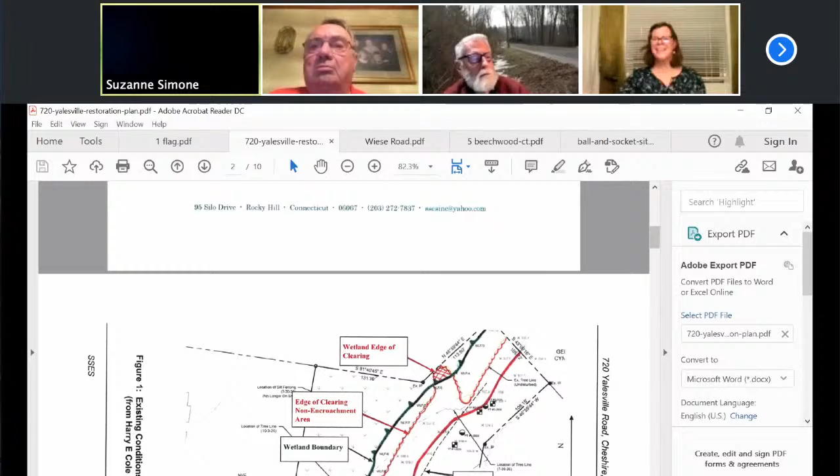Oh, I'm sorry, Jen, I'm putting your picture up. I was able to share it, so I hope that helps. That's really cool. You did say it was going to be very exciting, so that is neat. I didn't know you could do that.

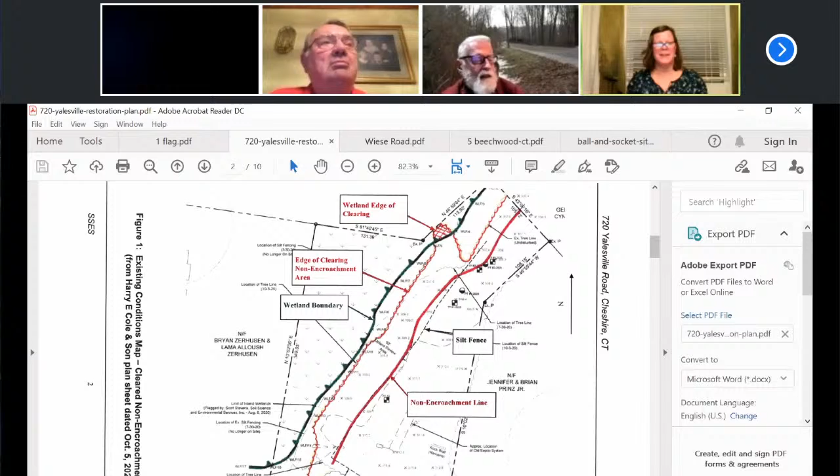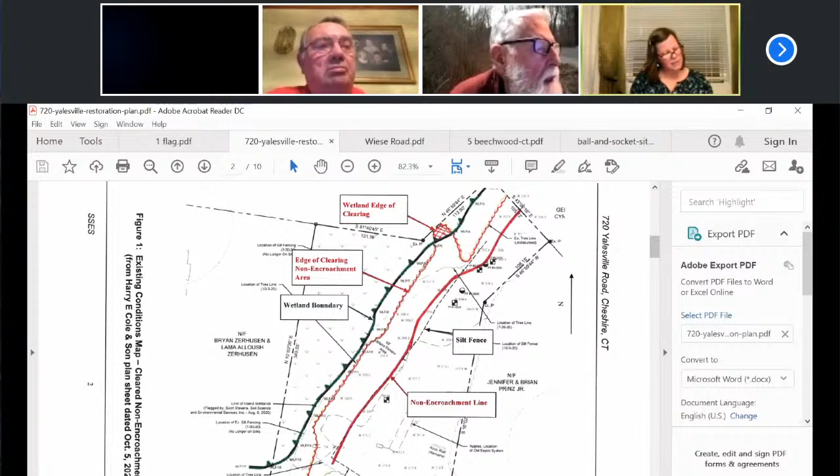Okay, cool. Yeah, so you can see the edge of clearing and your non-encroachment line, which was established previously. And also the wetland boundary is shown on there. So let's see. Can you jump to page 6, maybe, please? Sure.

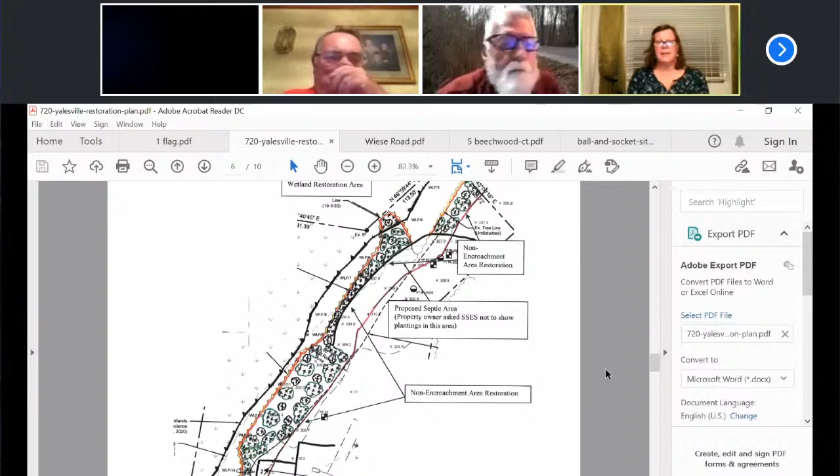Is this 6? Yes. So that shows the overall proposed plantings that we're recommending. And as you can see, there's a proposed septic area and a proposed driveway with some grading within your non-encroachment area. So the owner asked us to not show plantings in those areas.

So in the cleared wetland area, I'm proposing 1 tree and 5 shrubs. And in the cleared non-encroachment area, we're proposing 18 trees and 136 shrubs. Basically, the soils in the cleared wetland area have become vegetated. The herbaceous vegetation's coming back. It's reestablishing in that area. So I don't think a seed mixture will be needed in the wetland area.

There will be a seed mixture needed in the non-encroachment planting area just to keep the soils stabilized. And I recommend a seed mixture at the end of the report. It's from New England Wetland Plants up there in Massachusetts. They have a conservation wildlife mix or a New England wildflower mix. Either one would work in there, or a combination would be fine.

So I've recommended native non-invasive species be planted within the non-encroachment and wetland areas. Species for the wetland include pin oak, the tree species, and the shrubs are winterberry, highbush blueberry, and arrowwood. Non-encroachment area plantings can include sugar maple, black birch, eastern red cedar, pin oak, red oak, black chokeberry, shadbush, sweet pepper bush, gray dogwood, red osier dogwood, and some winterberry.

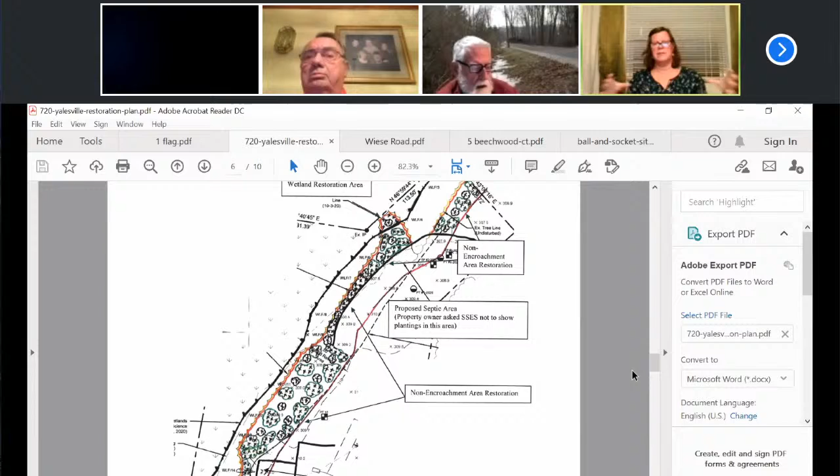We also recommend that the erosion sedimentation control measures should be maintained until the soils have all been stabilized on the site. We also recommend that the owner install some sort of physical demarcation so there's no accidental intrusion into this non-encroachment area in the future. That could include just rocks, or some sort of fence. I did notice there are quite a few large rocks on the site, so it could be a possibility.

As I mentioned before, he'll need to manage the invasive species within the planting areas until the native non-invasive plantings become established and can compete. And finally, we recommend monitoring reports for 5 years. The monitoring reports should document the survival rate of the plantings, any erosion sedimentation control issues in the areas, and whether any invasive species need to be controlled or managed. And I think that about sums it up. So if you have any questions...

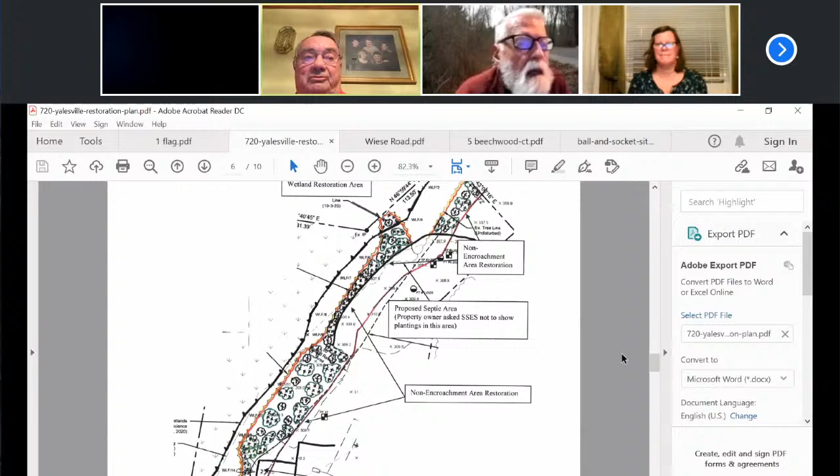I think it's a good plan. The only problem is this is a hearing for restoration, not a hearing for delineating the upland review area or the wetlands. We need restoration of the site as was originally approved. Now, I know that the permit has expired, but that doesn't pertain to the plan that was approved, which includes the non-encroachment line as well as the wetlands line. And I think it's a little premature to discuss a new permit when we haven't solved the problem, which was violation of the old permit, and the hearing calls for a restoration plan. That's my personal feeling. I don't know what the town attorney would say about it, but that's the way I look at it.

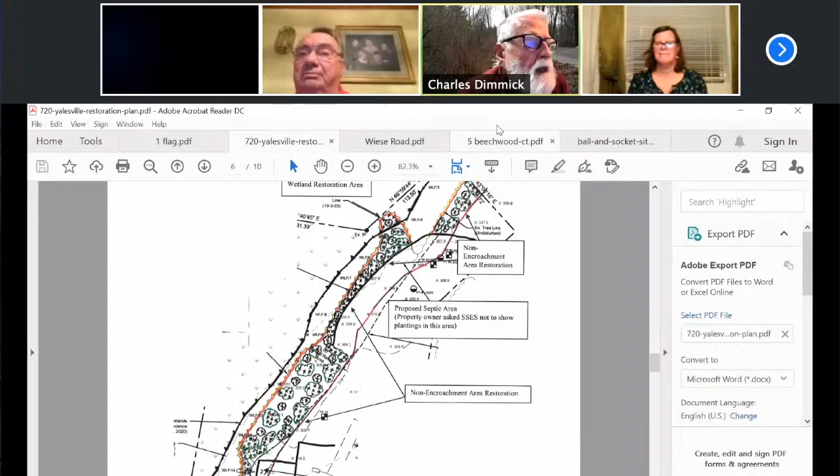Mr. Chairman, I agree it's a good plan, but there is the question of this proposed septic area, because that was, as far as I know, not part of the original permit, which, as you say, has expired. So I would say we approve the proposed restoration plan with the caveat that unless he goes through us to get a permit for this proposed septic, restoration must extend through the rest of that non-encroachment area also. Well, I agree with that, but I worry about moving the line for the non-encroachment area. Right.

Yes, Mr. Chairman, the non-encroachment area was previously established. So what is shown on the plan that Ms. Benno presented, that was the established non-encroachment area. That has been cleared, and Ms. Benno was hired to look at only some of the area. That's what the property owner had hired her to do. So it does not address the full complement of what was damaged. And my suggestion to the commission is that I do not have any motions prepared for acceptance of the restoration plan tonight.

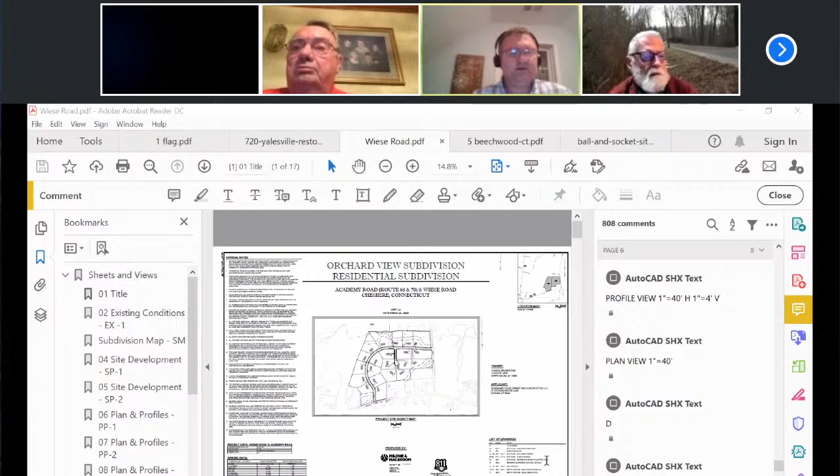Next sheet, I think, would be best, Suzanne. The parcel, which many of you are familiar with from driving around town, is most visible from Wiese Road, where as you enter from Academy Road headed north on Wiese, there's a large open field to your left with Norton Brothers Fruit Farm on the east. This property has been historically agricultural in nature, although the only relic of that use is the hayfield in the eastern roughly third or half of the site.

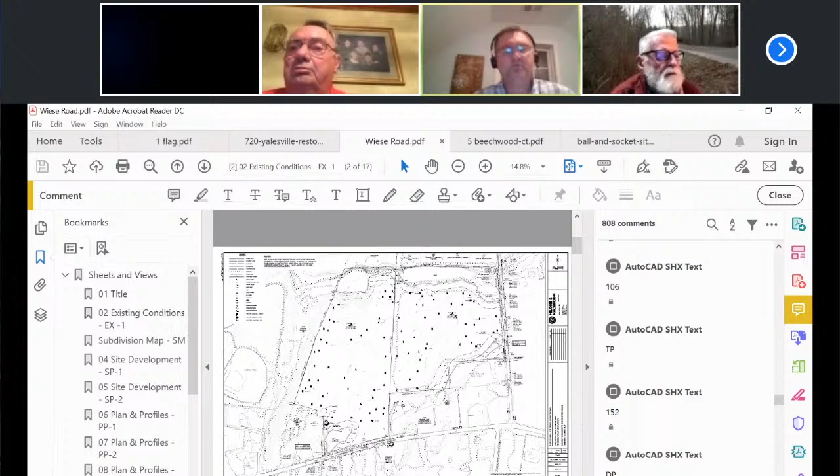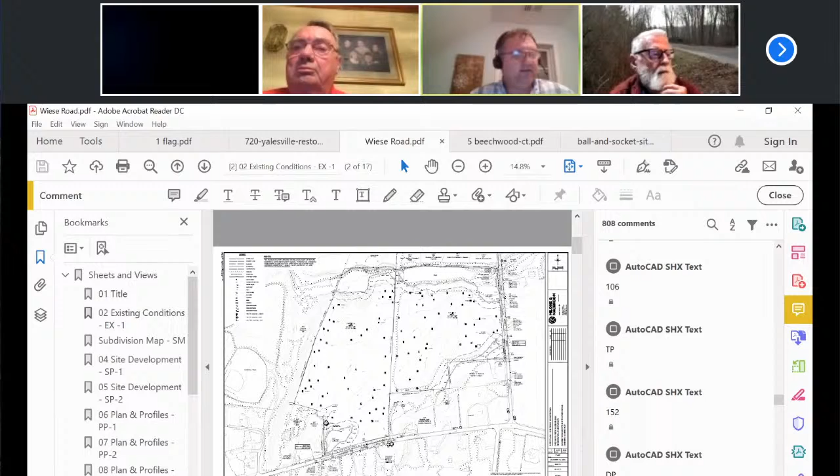The land uses surrounding it are single-family residential to the north, a subdivision approved around 2007 called Pemberley Estates, with Baxter Court being a cul-de-sac with about 10 lots off of it. To the south, along Academy Road, are single-family residential houses in the R40 zone. To the west is Cheshire Academy, with a recently constructed maintenance style building near the site being the only adjacent activity there. To the east across Wiese Road is Norton Brothers Fruit Farm.

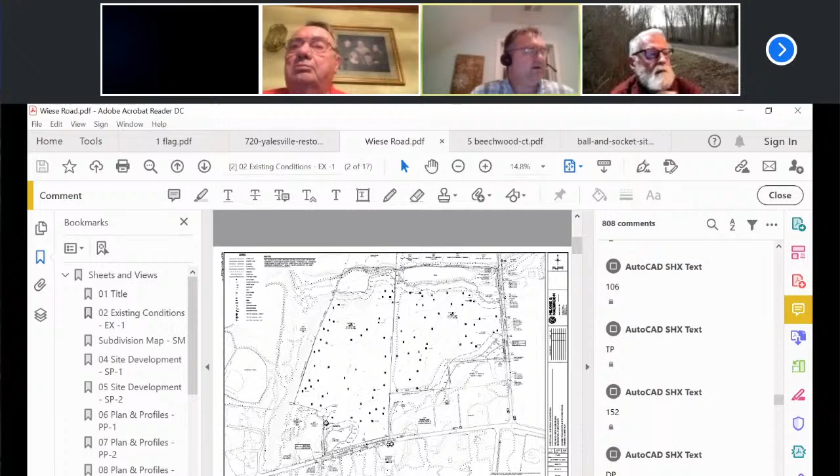The site includes a few different wetland areas, notably Honeypot Brook on the northern edge with a dam, impoundment, and a pond primarily located on this property, although the northern extents are on the Pemberley Estates parcels. That dam has associated wetlands, and in general the wetland edge is close to the water edge, though it extends a bit further south near Wiese Road. Roughly midway through the sheet is the dam creating the impoundment and spillway, and to the west is Honeypot Brook and associated wetland areas.

To the southeast along Wiese Road, there is a drainage swale classified as a field wetland. It is mowed and cleared as part of the historical agricultural use, and that wetland is conveyed via a small diameter pipe to the drainage system in Wiese Road.

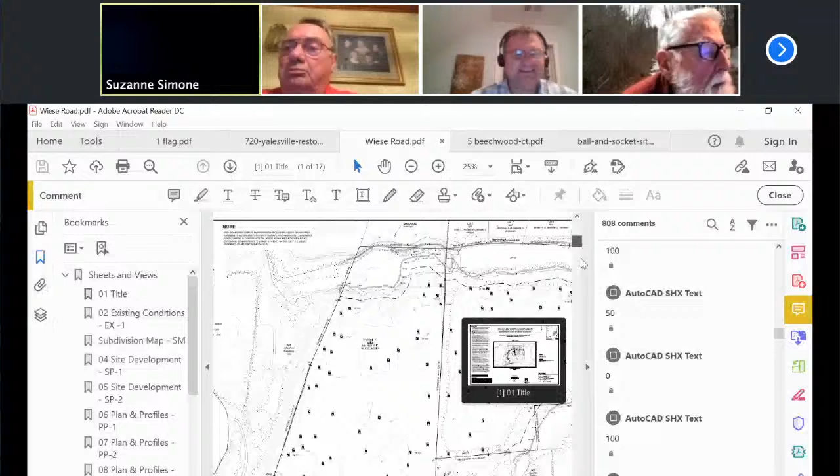Further to the southwest, Suzanne, if you could pan to the lower left and scroll down. There we go, in the lower central portion of the screen there is an isolated wetland area and associated upland review area, essentially a low draining pocket that eventually drains to a catch basin adjacent to Academy Road, off to the west.

So the majority of the site, just over half, is presently wooded, although historically was agriculture just as the eastern side of the site is. The eastern side again is hayed fields.

So the topography, as you can see from Wiese Road, is rolling in nature, actually very interesting topography on the site. The high point is located in the south central portion of the site at 252, draining down to Honeypot Brook to the north, which is roughly 200 plus or minus on the northwest side, and then back down to 238 from the high point in the central part of the site to Academy Road, with the low point being 238 in that wetland pocket.

And that is a brief summary of the existing conditions. The wetlands were originally flagged in 2007. I believe there was an application presented to this commission that was ultimately withdrawn for a similar residential style development. Matt Sanford of our office reinvestigated the site and redelineated the wetlands this year.

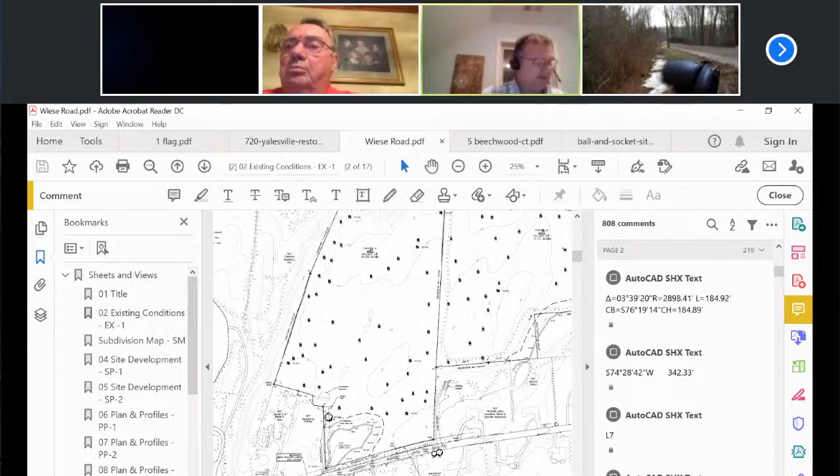What we propose for the property, Suzanne, if you can go to sheet SP1, please, which is 2 sheets down. What we propose is a 21 lot single family residential subdivision that conforms to the underlying R40 zoning criteria.

All lots will gain access from a through road that will come from Wiese Road through the site out to Academy Road, or off of a short cul-de-sac, which you can see sort of in the center of your screen. The total linear footage of roadway is about 2,600 feet, of which 2,250 feet is the through road from Wiese to Academy, and the cul-de-sac is about 340 linear feet.

All lots are a minimum of 40,000 square feet in size. They will all be served by septic systems and public water, which will be brought in off of Wiese Road out to Academy. The roadway itself is a standard town roadway, 30 feet in width with sidewalks on both sides.

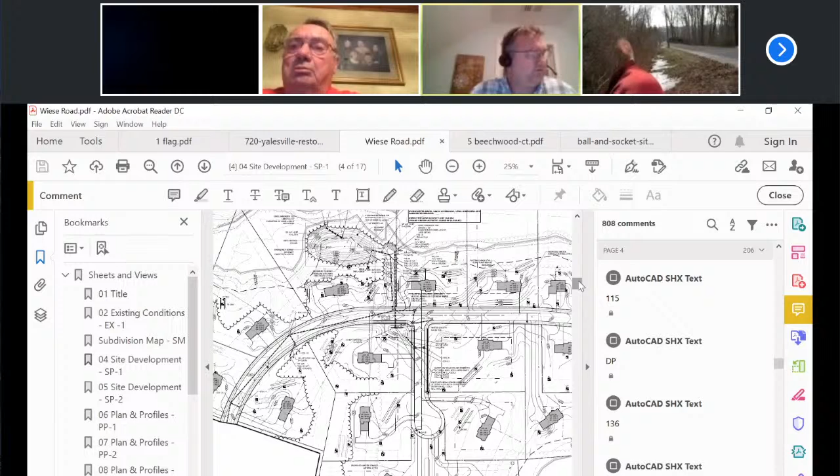With a conventional catch basin and pipe drainage system, which will convey stormwater to a series of either water quality basins or more significant stormwater basins that serve as detention facilities. So what we have off of the through road in the upper part of your sheet is the largest of the stormwater basins, which is located on lot 4.

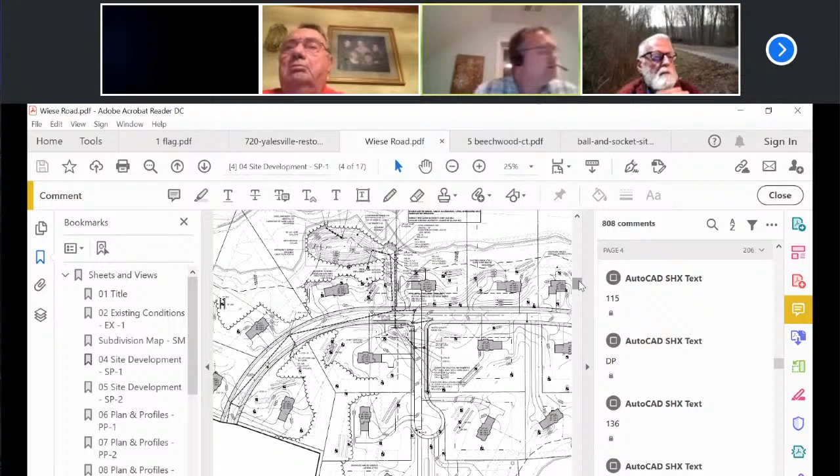This stormwater basin conveys the majority of the roadway system. It will be located down gradient of any of the lots, partially within the upland review area, partially out of the upland review area, and down gradient of the spillway and dam associated with the pond. That basin represents the bulk of our upland review or regulated activities, which is approximately 0.3 acres in size, just over 0.3 acres.

We have another small one to the east or to the right. Suzanne, if you could pan over. We have a small stormwater water quality basin, which will collect at the very end of our proposed road just before it gets to Wiese Road, where it will discharge into a water quality basin to allow stormwater to have reduced velocities before it enters into the wetlands. Relatively small watershed contributes to that small water quality basin.

That is, I guess, the second one - we call it regulated activity number 1, but the second one I'm discussing - upland review activity of 0.11 acres. And the last, most significant activity within the upland is further to the south along Academy Road. Suzanne, you're gonna have to scroll down to sheet SP2. Thank you.

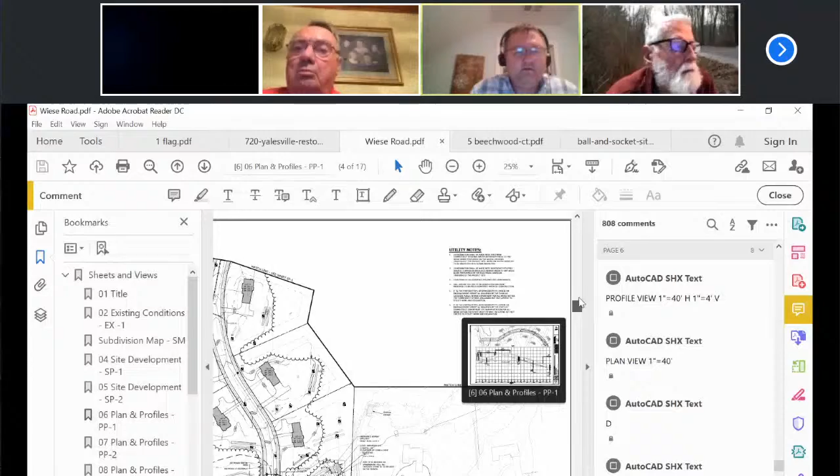So the grade from the high point heading towards Academy Road, we're capturing the runoff with our proposed roadway system through a couple catch basins to a relatively small stormwater management basin to the east that is not located in the upland review area. However, portions of the road and the associated grading for the road are located in the upland review area, and that's for a very specific reason.

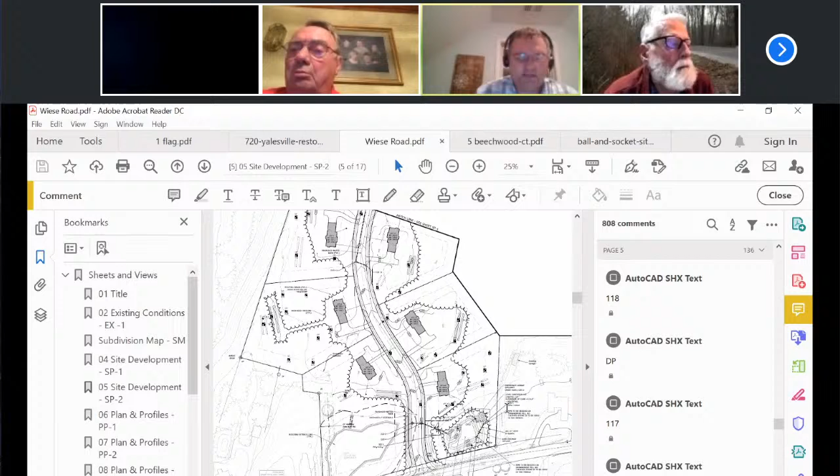Our intersection with Academy Road is chosen because there is a fairly abrupt, at least abrupt as far as state roads go, high point along Academy Road. And we are placing our road as close to the high point as we can to ensure that we can see over the high point for sightline distance looking to the west towards the center of town, as close to the high point as we can without proposing any activity within the wetland itself.

So what we have in order to provide a safe intersection is some minor activity within the upland review area associated with the road. Again, the location is chosen specifically because of the geometry of the high point on Academy. That upland review activity is also relatively small, under a tenth of an acre, roughly 0.07 acres. So the total upland activity is just about half an acre in total between the three separate areas.

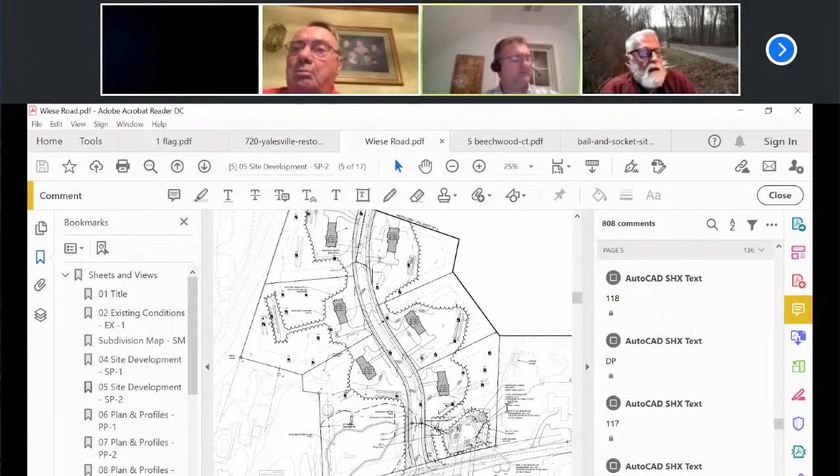In terms of the lots themselves, we only need a very small area of upland disturbance on lot 1, again on SP1, Suzanne. Sorry to make you jump around. Okay, am I going back to where I was? Yeah, previously, you gotta go back. I'm sorry.

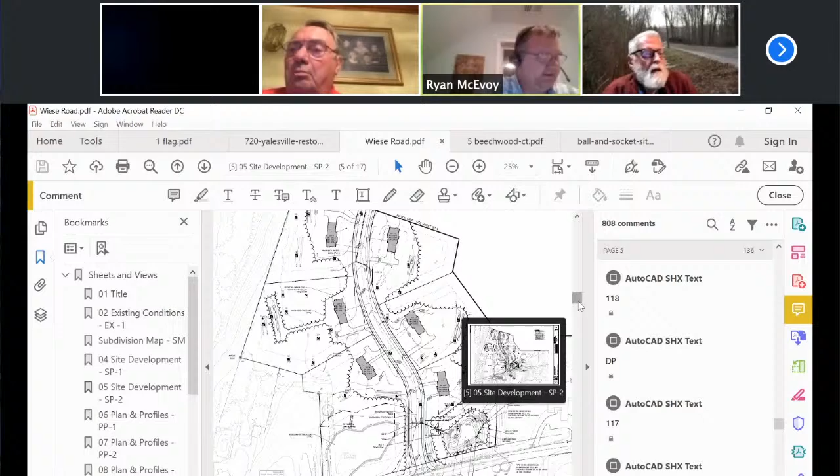So, lots 3 and 1, we anticipate a very minor amount of activity within the upland review area for the purposes of grading for these septic systems. By activity within the upland, I anticipate about 5 or so feet into the upland review area.

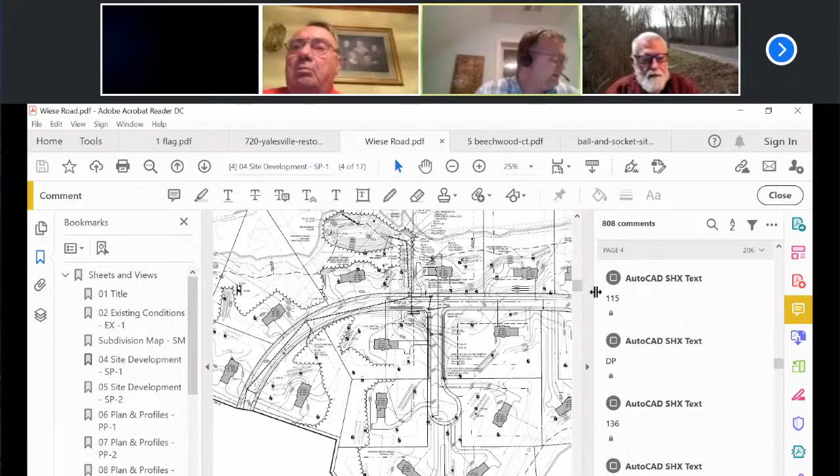The remainder of the lots mostly have no upland review area or wetlands on them. There are a handful, namely lots 1, 2, 3, 4, 5, and 9, and lastly lot 20, that do have wetlands and or upland review area, but we will not be required to do any grading or site disturbance within the upland review areas.

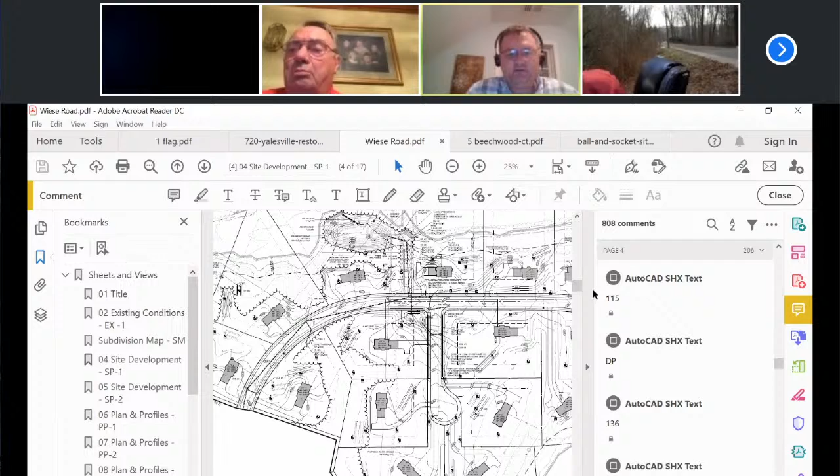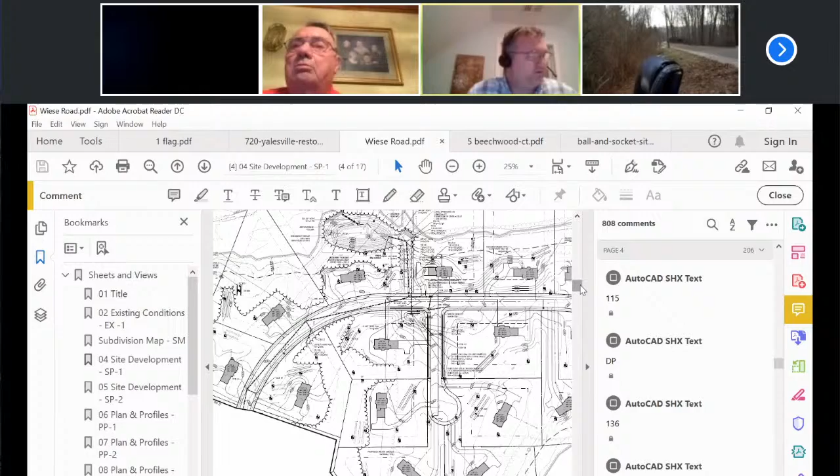One item we don't show on our plans at the moment is how we could theoretically provide at least recreational access to the pond for 3 of the lots in the development, lots 1, 2, and 3, on the upper portion of the sheet in front of you. They have fairly significant parts of their lots to the north that will include the pond. While we don't require significant upland review activity to construct the lots as proposed, the upland review area is quite overgrown with multiflora rose, and pedestrian or recreational access to the pond is not really feasible at the moment on those lots.

As some of you may recall, there was some issue with the properties to the north, where clearing was done perhaps beyond expectations with the original Pemberley Estates approval. So before we propose anything in that area, I wanted to get an understanding from the commission as to what sort of recreational activity might be permittable or possible within that area to gain access to the pond. That's certainly something we'd be willing to accept suggestions on.

In terms of other application materials, we received a comment letter from Anchor Engineering, the consultant engineer reviewing the plans. There are a number of comments, many of which are associated with the planning and zoning application, which is also pending. They do have some comments regarding our stormwater basins and how they're constructed, and we are working to address those. We don't have a response yet, but expect to have one as early as tomorrow or perhaps early next week.

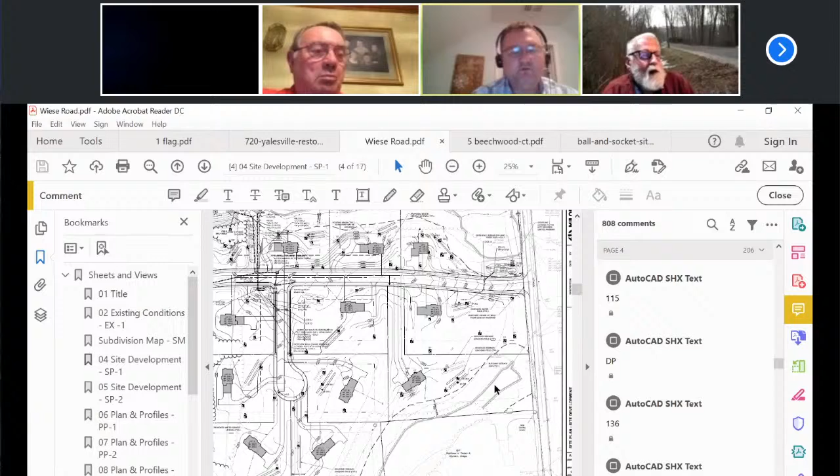Additionally, the plan includes a sediment erosion control plan and narrative designed in accordance with the 2002 guidelines for sediment erosion control, which includes temporary sediment traps, silt fence, hay bales, and down gradient of any activity near the wetlands.

I guess with that, that summarizes my brief presentation of the application as proposed, and I'd be happy to answer any questions that you might have. Ryan, I have one that occurs immediately. Sure. There are a lot of test pits on this site. Yes, sir.

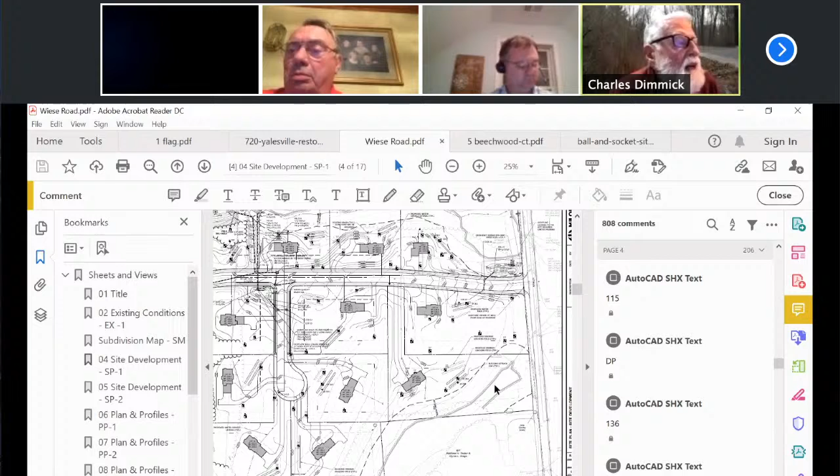And what was submitted to us, at least what I received, I didn't get any data on the actual test pits. I got their location, but not the actual data. As I remember, these are Yalesville soils for the most part. Yes. And in that part of town, when you dig down, you quite often find remnant chunks of sandstone in there because the old sandstone rotted away in forming that Yalesville soil. So I'm wondering if in your test pit you encountered it. The sandstone's so soft you can actually dig right through it, but it's common in that area.

Yeah, so our plan set, Dr. Dimmick, does include all the test pit results, and those are found in the last, I believe, 2 or 3 sheets of the plan set. I didn't get those last 2 or 3 sheets in my copy. I think that's what it is. Okay. If Suzanne has a copy of that, I might be able to take a look at it. Ryan, is it something that I can scroll to right now?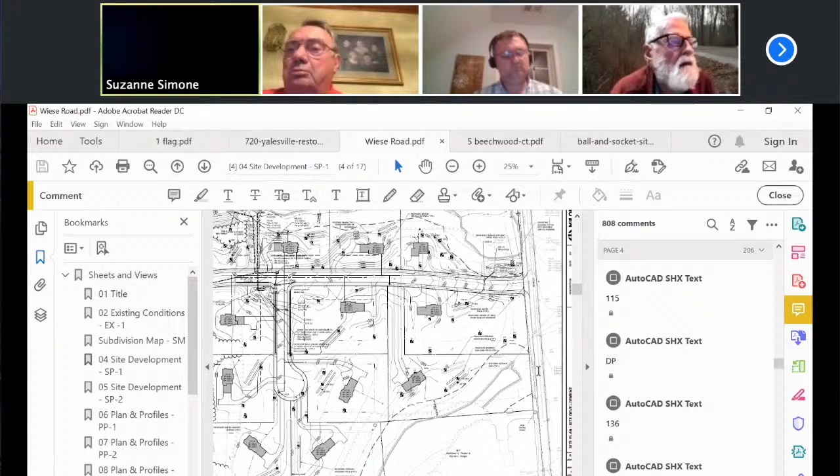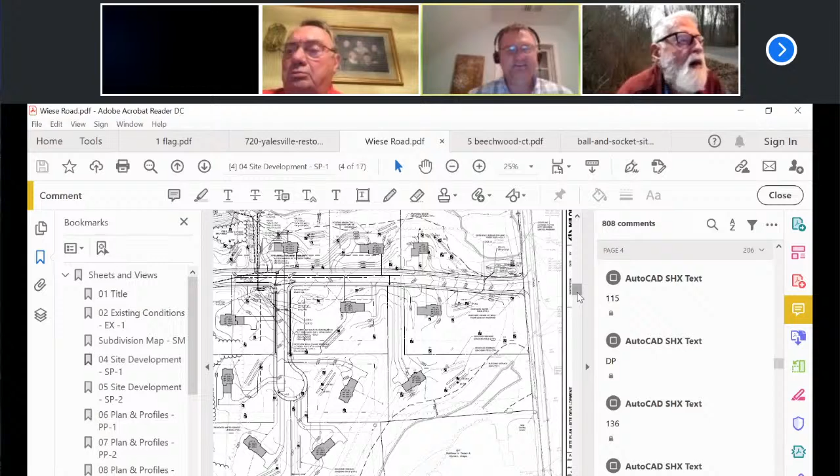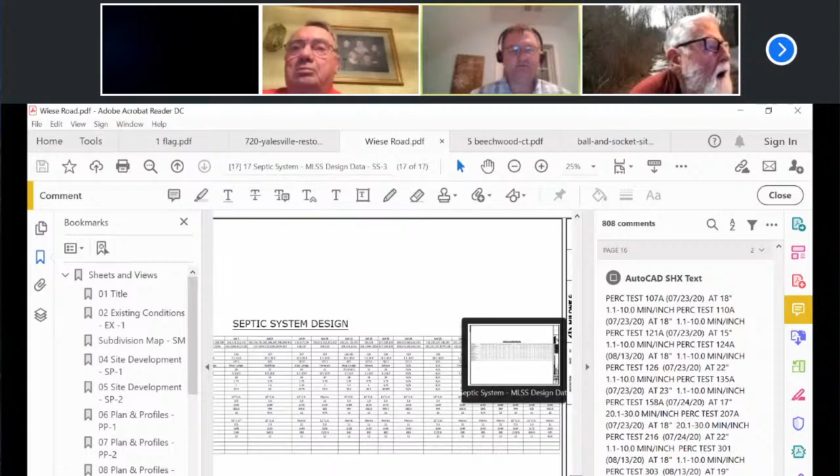Yes, there are some 100 or so test pits on the site, so there's a lot of data, and it may not be easy to pick it apart during this meeting, but yeah, the second and third last sheets of the set would include that data. But to go back one sheet up, to answer your question, Charles, about the nature of the soil, we did encounter some of what you spoke of, and the way Chesprocott tends to identify soils of that nature, they refer to it as atypical ledge, even though oftentimes it doesn't resemble bedrock at all. Well, you can get a shovel right through it, but it does tend to cause water migration to start moving horizontally instead of vertically when it gets to them.

Yes, and in the septic design, when we encounter soils like that, we consider that to be a restrictive layer, similar to a hard pan or similar to ledge itself. And that other soil you have on the site down the middle of it is a Wethersfield soil, which also tends to have a hard pan, as I remember. Yeah, so the soil testing was a little mixed. There were some lots that had some challenges with regard to restrictive layers, but we did just receive yesterday a letter from Chesprocott that all the lots have suitable soils for septic. Right. It's just what occurred to me when I looked at that and saw the soil types.

Right. Dr. Dimick, would you like a full-size set of sheets that contain all this information? Yes, I would if it's not too much trouble for the town to send it out. No, that's no trouble. I presume we're going to move to have a public hearing on this, considering the complexity of the application. I'd be happy to provide extra copies of that, Suzanne, to your office, so you don't have to tear apart your sets. Okay, thank you.

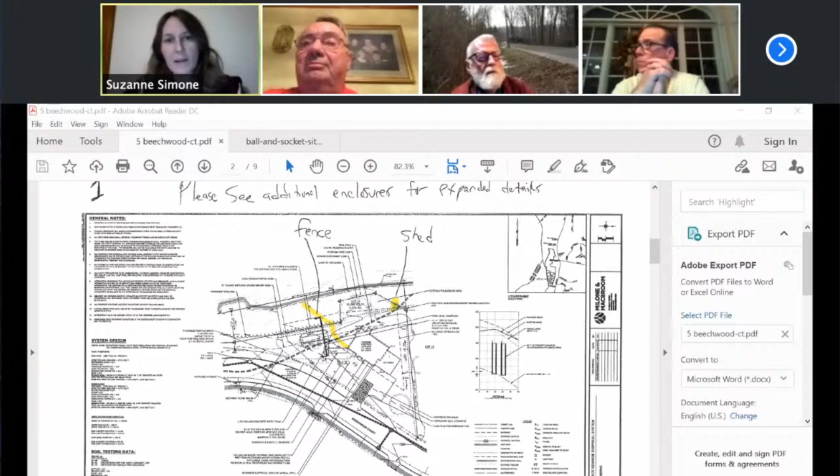So this is the information that Mr. Pincus had supplied. It identifies the location of the property, the existing house, the wetland area, the marked non-encroachment line, which follows in this sort of jog out that goes towards the woods. And as identified on the plan, it shows a location for the shed and the fence. And in speaking with Mr. Pincus, for the shed, the majority is proposed to be outside of the non-encroachment area, with a third of the shed requesting to be moved into the non-encroachment area. And it's also discussed in the narrative that there's no clearing that's needed for this.

The privacy fence going from the house towards the rear of the property proposes to install some posts within that upland review area, and Mr. Pincus had indicated that there was no vegetation proposed to be cut, and that the panels were going to be up much higher off the ground, with the purpose being that they would be level to the house. And with the topography, there will be space underneath the fence. And again, the purpose was privacy, not so much to keep anything out.

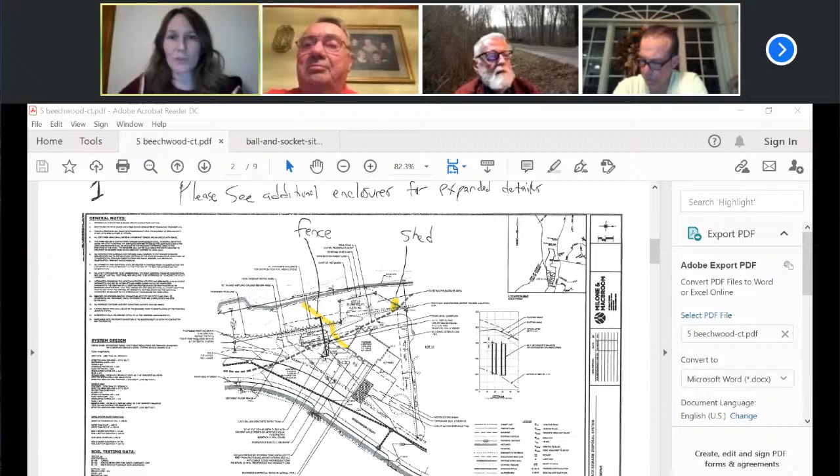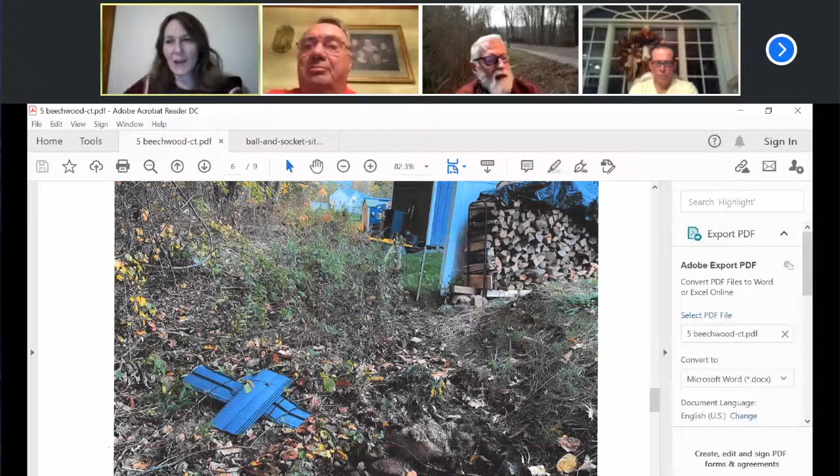And Mr. Pincus, feel free to jump in if there's something that I'm missing. You did a really good job. And the pictures that were attached here is the shed. And then we have some details of the location. So this is the existing house. Okay, this is the area where the shed is proposed. And Mr. Pincus, this is the 1/3 area that is proposed. The shed will project out, is that correct? Correct. Okay. Yes.

And then this shows the direction of the fence. And this indicates the end of the fence. Yes, that's correct. So is that basically at the edge of clearing? Yes. Well, the clearing continues past that, actually. Okay. So it's mostly lawn area.

Well, I'm sorry. When you say clearing, it's just... Oh, sorry, I mean lawn area. It looks as though you are standing maybe 1 foot off of the lawn. No, I'm off the lawn by probably 12 feet. Oh, okay, I'm down a little bit of grade.

So okay, I took your advice after we spoke, and I ended up finding the other post, which was much farther down than I was looking, to be honest. So I put up a string connecting the posts, and the area for this fence in the upland review area is no more than 10 feet into the upland review area.

Just giving the extra dimension of the string to see where is considered not upland review area, referencing the wetlands, and where the goal would be to stop to provide the sightline block that we're looking for. So I'll probably be looking at 1 to 1.5 panels of fencing. So 2 to 3 hand dug fence posts.

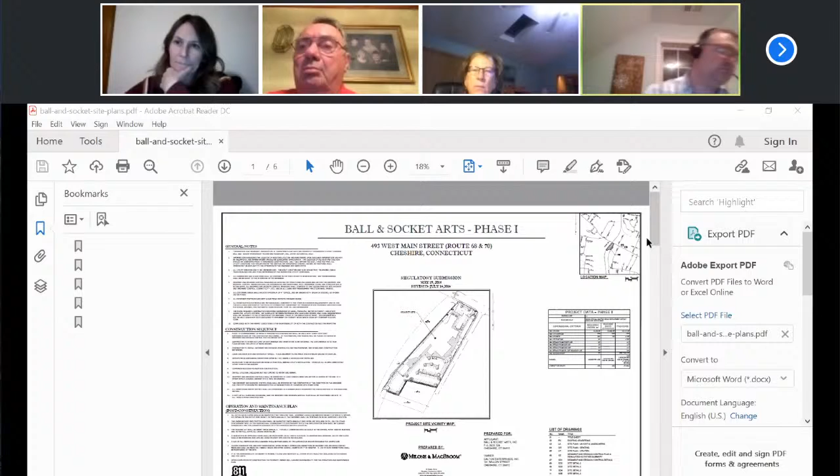And in particular, much of the site work as part of this application is centered or focused on the south side of the building as you go along Willow Street. Suzanne, if you could go to sheet LA, perhaps, which is the third sheet in the set.

So to the south of the building, which is in the bottom of your sheet, there are essentially paved access ways, storage areas, some old dilapidated buildings in the south part of the site, some essentially just lay down areas. And we're looking to demolish some of the buildings in that area, rehab some of the buildings, and create, to the extent possible, parking in that part of the site, and also plaza space and entry statements to the south side of the building.

There is very little change in impervious surface as a result of this in the south side. Namely, in the southwest, there are some areas that were historically disturbed but have somewhat revegetated. So we are proposing some minor stormwater management improvements in the southwest corner of the site. And the additional improvements in that area will include underground stormwater storage, water quality enhancements, and point discharge along the stream, or the canal rather.

In the northern part of the site, there is some rehabilitation or some new parking as well, some of which is within the upland review area. All that area along the canal on the front side of the building, again, is historically disturbed. So what we're looking to do is essentially create parking in that area. Total upland activities are roughly 0.16 acres in the northern side near West Main Street, and 0.27 acres in the southwest side, south of the building.

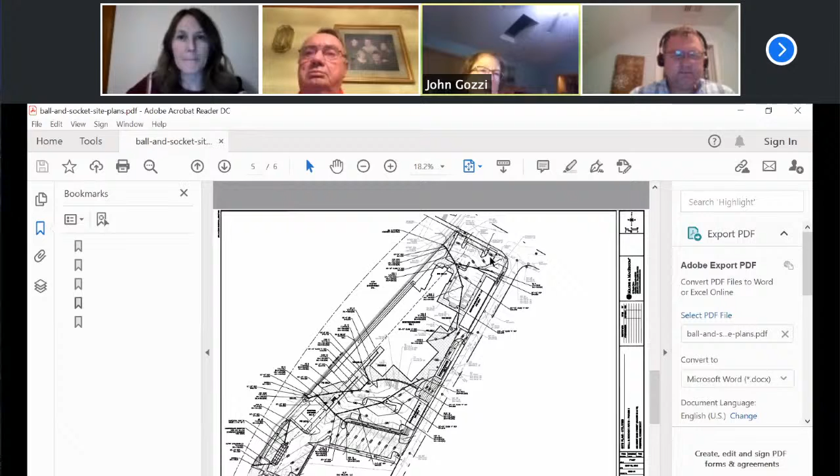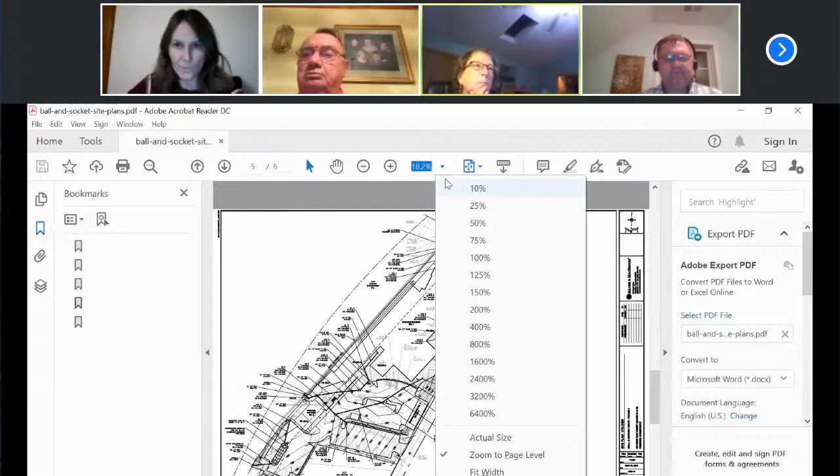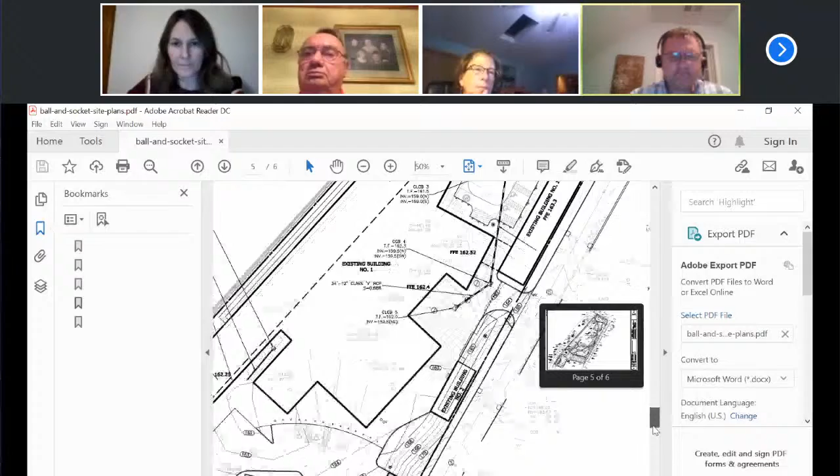Even one more if you could, Suzanne, maybe to 50%. Thank you. And scroll down. Scroll, yeah, down. And to the left. Oh, did I go to the wrong sheet? It jumped. Okay. Now scroll to the left.

Okay, so the first stormwater outfall I referred to is in the lower leftmost corner of the screen, where we call end wall. That is just into the wetland area, and that's chosen because of the available elevation on the site to discharge the stormwater. And then the next direct wetland impact is just to the north, or up on the sheet, to the left of what we call existing building number 5. That is also a stormwater discharge that will end in an end wall, right adjacent to the canal itself.

So those are the 2 direct wetland impacts that were approved as part of this, and the upland activities associated with parking in the north and south of the parcel. Again, identical to what was approved before. So if you have any questions for me or for Anthony, we'd be happy to answer them. Any questions? No questions?

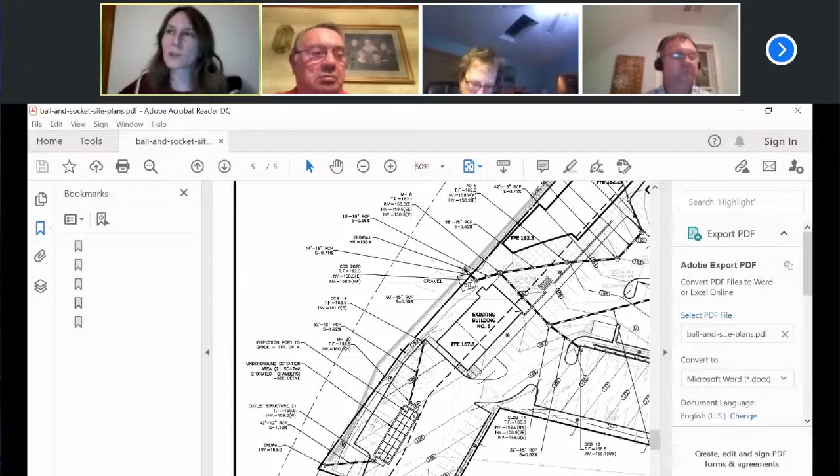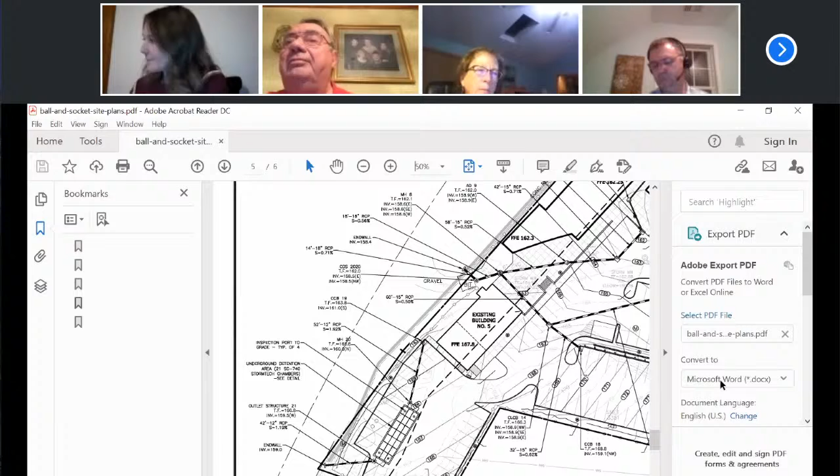Mr. Chairman, the engineering consultant is reviewing this, and it's expected that they will get comments back to the commission next week in time for the next meeting. Okay. In time for the applicant to take a look at it too, right? Before the next meeting? Hopefully, yes. Okay, sounds good. So we've gone as far as we can this evening? I think so, yes. Okay. See you at the next meeting.

Is there any further new business? No. Okay, without a motion, I'll close this meeting at 8:32.

Well, goodbye. Bye. Night. Nice picture, Charles, really is. Yeah, I like it. Yes, well done. I was wondering how come it was still daylight where he is. Well, that's along the canal, so the figure is appropriate for Cheshire wetlands. Okay, very good. Mhm.